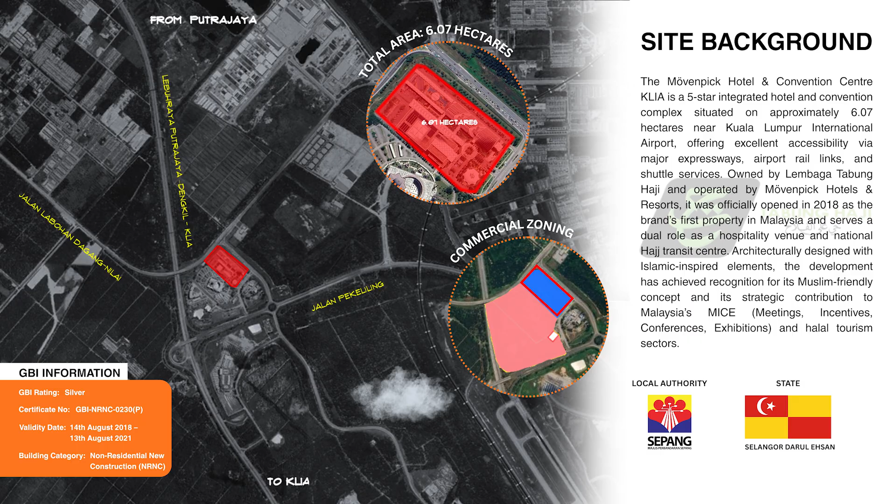For this slide, I want to share more achievements from the Mövenpick Hotel. The case study got Green Globe certified, a recognized benchmark for sustainability excellence in the global tourism and hospitality industry. This also marks a new milestone in the sustainability journey for the case study, guided by Accor's global sustainability strategy.

These are the 6 assessment criteria that have to be achieved to get a GBI rating: energy efficiency, sustainable planning and management, water efficiency, indoor environment quality, material and resource, and the last one is innovation. All the sub assessments have been identified during the site visit.

For number 1, energy efficiency design, the sub is EE for renewable energy. During the site visit, I found a solar panel on the rooftop of the convention center, and the interesting fact is that this solar panel project has a collaboration between Tenaga Nasional Berhad (TNB) and the Mövenpick Hotel Management to utilize solar panel technology to generate clean renewable energy, reduce carbons, and minimize reliance on conventional energy resources.

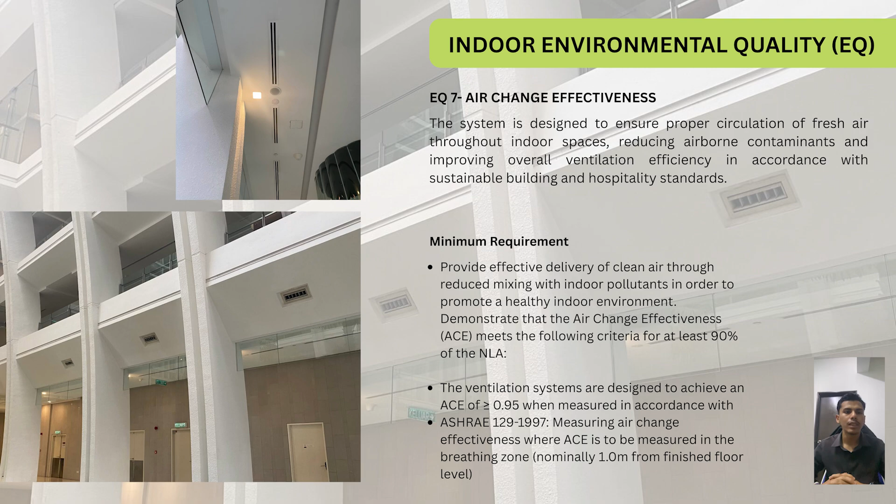The minimum requirement is to provide effective delivery of clean air through reduced mixing with indoor pollutants. The second is the ventilation system, designed to achieve effective delivery of clean air through reduced mixing with indoor pollutants. The third is ASHRAE 129/1997, to measure air change effectiveness when measured in the breathing zone.

For EQ8 daylighting, you can see the picture that the site fully utilizes daylight. Also, you can see the thermal stratification and cooling strategies, where light direction influences the building, and they use sun direction to support daylight performance incurred during the commissioning stage.

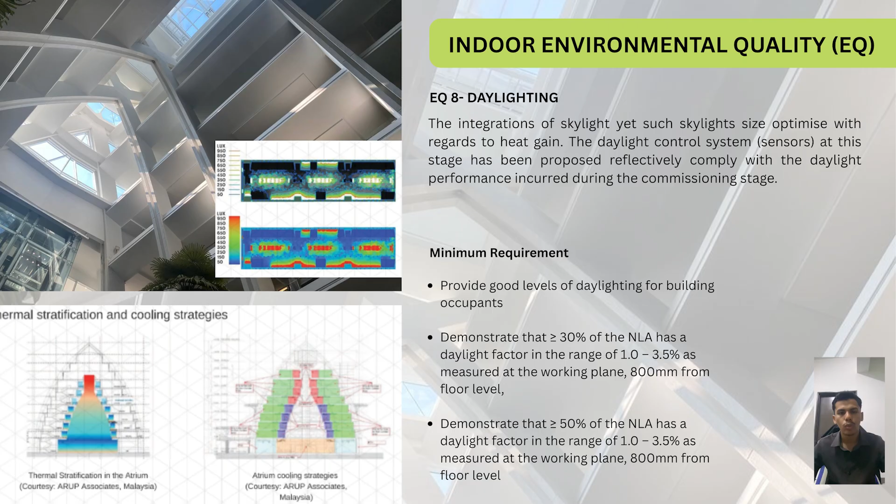These are the minimum requirements for EQ8 daylighting. There are three, which provide a good level of daylighting for building occupants. You can demonstrate that above 30% of NLA has daylight factors. The last one is to demonstrate that above 50% of the NLA has daylight factors in the range of 1.0 to 3.5% as measured.

Third, for indoor environmental quality, I found evidence for EQ10 electricity lighting levels. They usually use connected lighting with motion sensors to optimize energy. The floor plan for Mövenpick hotel shows that 100% of the building is connected with light sensors and 38% with motion sensors to optimize energy used for illumination.

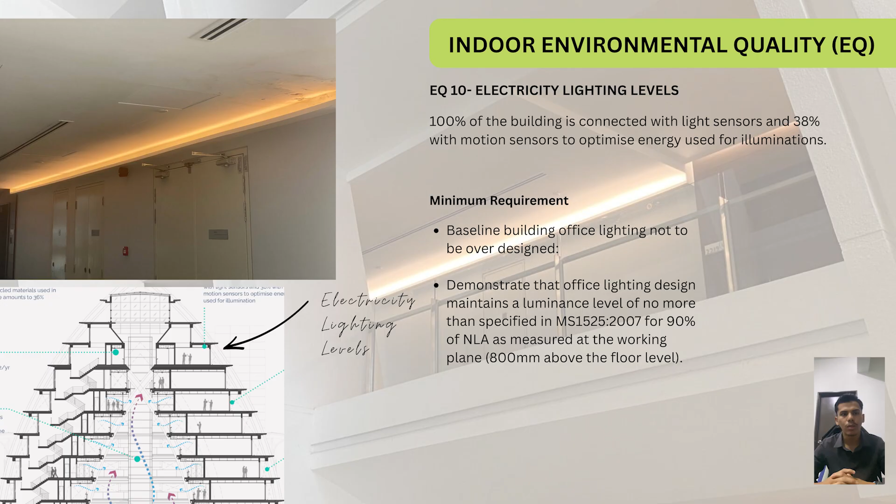This is the minimum requirement for EQ10: baseline building office lighting not to be over-designed. The second is to demonstrate that office lighting design maintains a luminance level of no more than specified in MS 1525:2007 for 90%. Next, for number 4, EQ12 external views.

This view is on the rooftop of the hotel, as you can see at the floor plan given below the picture. This external view maximizes access to natural scenery, landscaping surroundings, and outdoor visual connection within guest rooms and public spaces. This approach enhances occupant comfort and promotes well-being, creating a more pleasant indoor environment aligned with sustainable hospitality practice.

These are the minimum requirements for EQ12, to reduce eye strain for building occupants by allowing long distance views: demonstrate that above 60% of the NLA has a direct line of sight, and the last one demonstrates that above 75% of NLA has a direct line of sight through vision glazing.

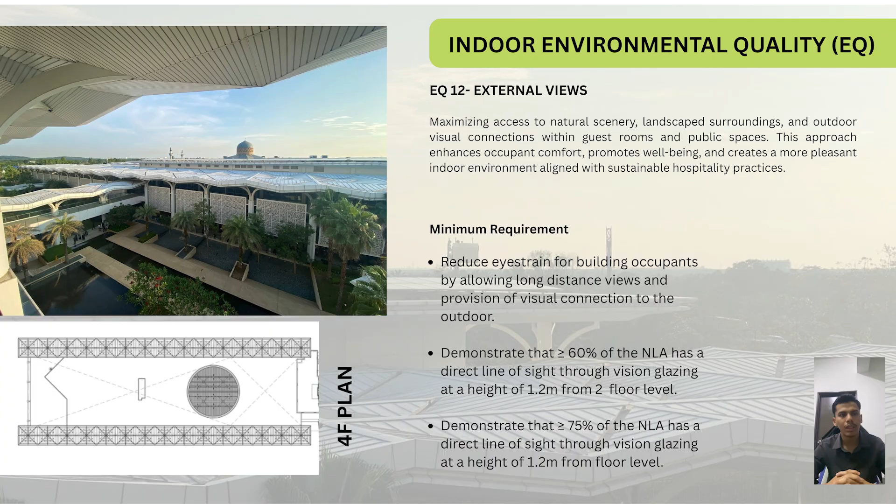Sustainable site planning and management: transportation. This hotel provides convenient access to public transportation networks. As you can see, there was a bus stop here, and the area of the bus stop, as you can see on the floor plan, is placed on the left of the floor plan.

This public transportation is strategically located because it's near KLIA international airport, and it promotes sustainable mobility, reducing vehicle dependency on private vehicles and enhancing accessibility for guests and visitors.

These were the minimum requirements to reduce pollution and land development impacts: second, locate the project within 1 kilometer of an existing or planned and funded transit line; third, locate the project within 500 meters of at least 1 bus stop.

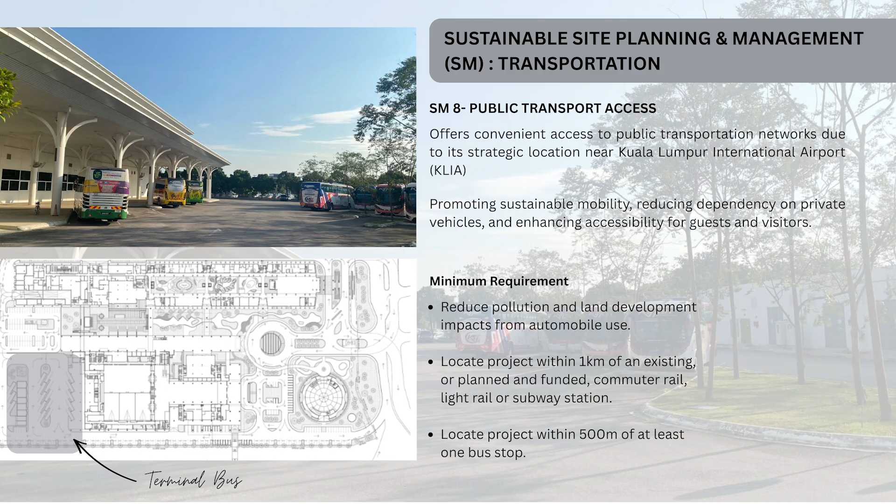Next, for parking capacity, you can see around the hotel there is also an indoor parking and outdoor parking.

The goal is to provide adequate parking capacity to accommodate hotel guests, visitors, and event attendees while ensuring efficient traffic circulation and avoiding traffic congestion in the hotel. A well-planned parking facility also supports sustainable transport management, improves user convenience, and enhances overall mobility around the development.

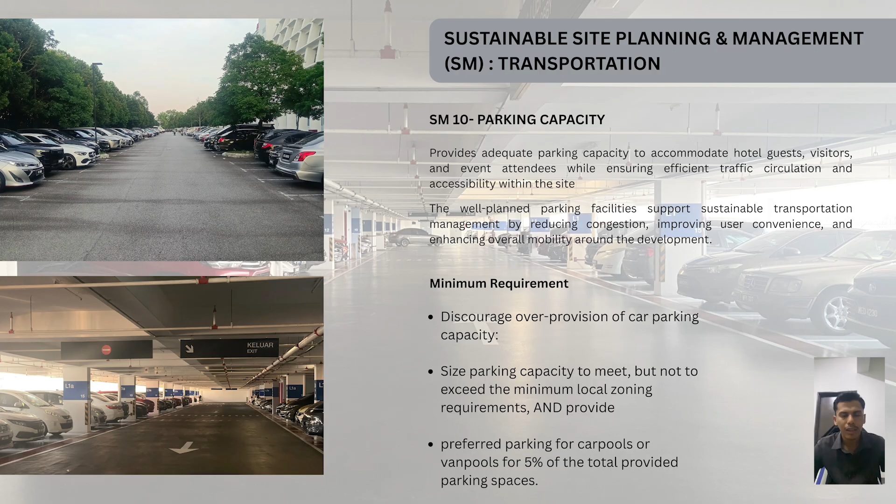These were the minimum requirements for SM10: discourage over-provision of car parking capacity, and size parking capacity to meet but not exceed the minimum local zoning requirement. The last one is to provide preferred parking for car pools and van pools for 5% of the total provided parking space. For sustainable site planning, SM12, there's a green roof.

It's the same place with the external views. They have designed the green roof, or the greenery for the rooftop, on the 4th level. The green roof helps reduce heat absorption, improve insulation, support stormwater management, and create a greener surrounding environment.

Besides, they also designed pool facilities and a playground for children, and included landscaping around the rooftop. You can see they fulfill a lot of the minimum requirements for hardscape and greenery applications, shades within 5 years of occupancy, paving materials using paving stone and wooden material on the right and left sides for the resting area, and an open grid pavement system.

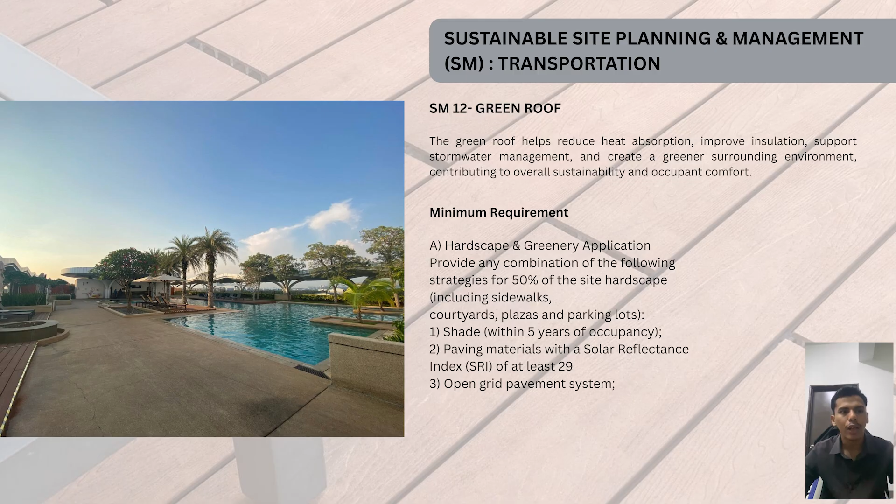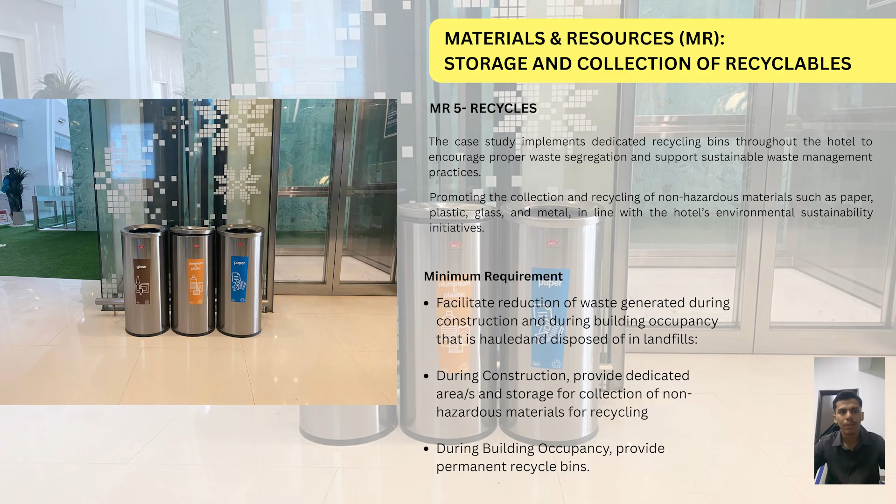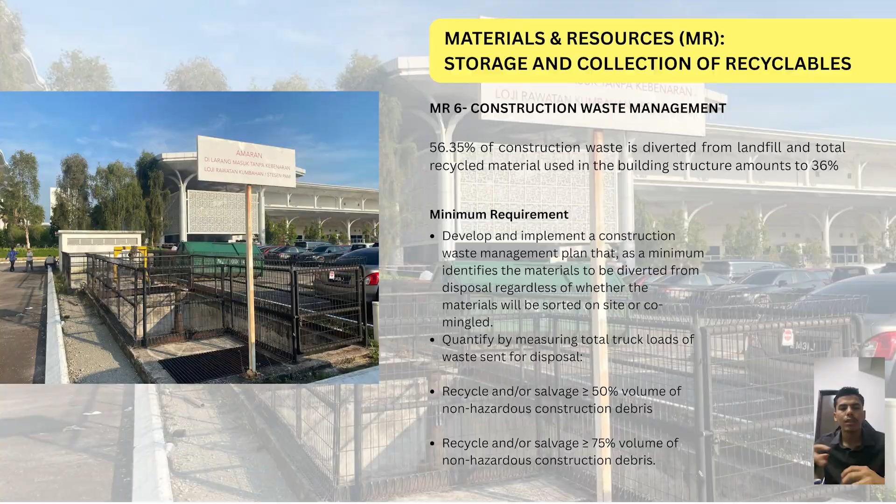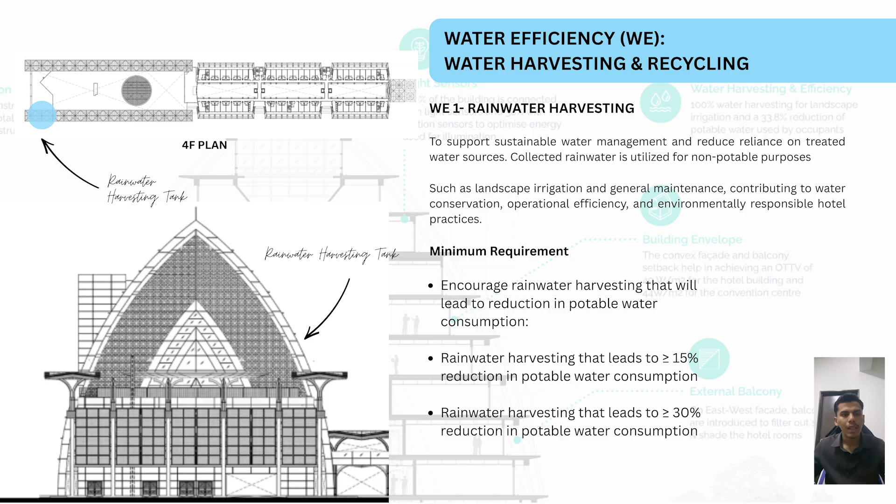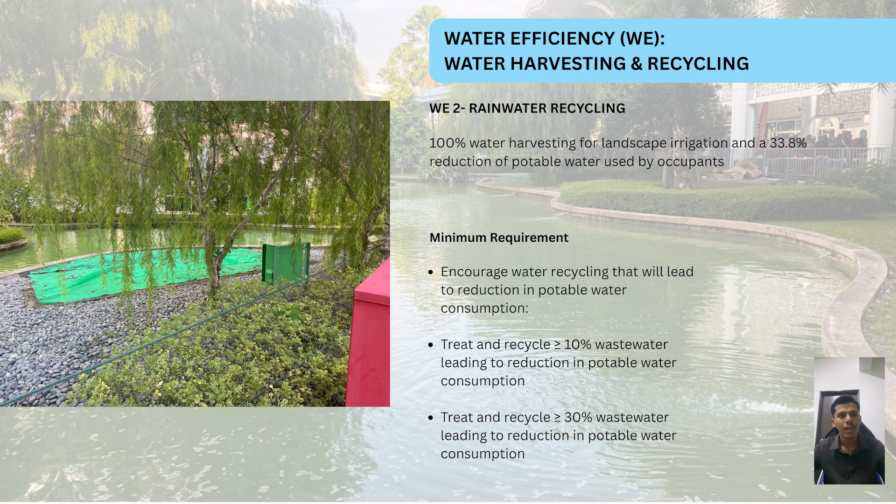For WE2, rainwater recycling, using 100% water harvesting for landscape irrigation, achieves a 33.8% reduction of potable water used by occupants. The minimum requirements for WE2 are: encourage water recycling that will lead to a reduction in potable water consumption; recycle above 10% wastewater leading to a reduction in potable water consumption; and recycle above 30% wastewater leading to a reduction in potable water consumption.

The last assessment criteria is innovation. The hotel management had established the Green Globe certification committee, and these are the organizational charts. A green team also plays a role in achieving development on the sustainable management plan by itself.

This team assesses performance, gathers feedback, and stays informed on evolving sustainability trends, ensuring that the SMP remains a dynamic, forward-looking tool with growth and adaptation over time. The minimum requirement for IN1 is to provide design teams and project opportunities to be awarded points for exceptional performance above standard.

So after going through every assessment criteria of the Green Building Index, these are the recommendations by myself.

This case study can be strengthened by the implementation of energy efficiency systems, expanding renewable energy usage, and improving indoor environmental quality, since there is no EV parking in the indoor parking facilities, and no micro-mobility facility.

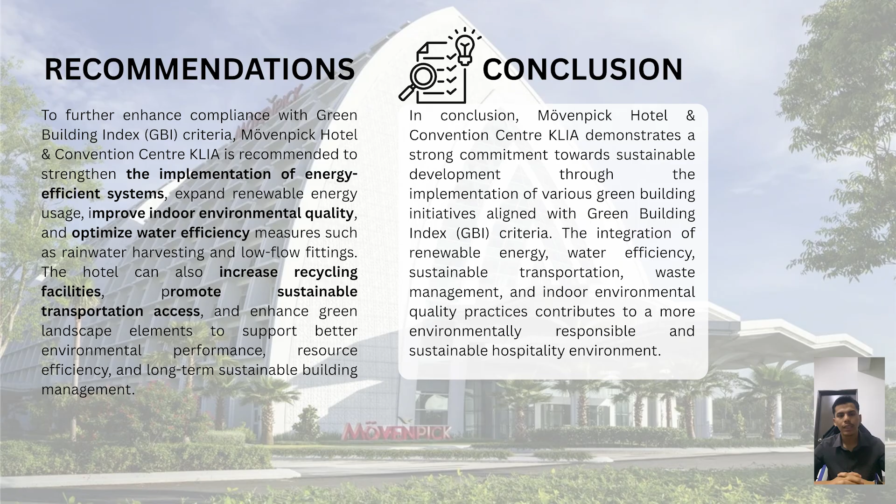So that can be concluded for the recommendations to support better environmental performance, resource management, and long-term sustainable building management. To wrap up my presentation, Mövenpick Hotel and Convention Center KLIA has a strong commitment to achieving sustainable development through a lot of implementation and green building initiatives that align with the GBI index and criteria. This case study demonstrates the integration of renewable energy, water efficiency, sustainable transportation, waste management, and others toward a more environmentally responsible and sustainable hospitality environment. That's all from me.